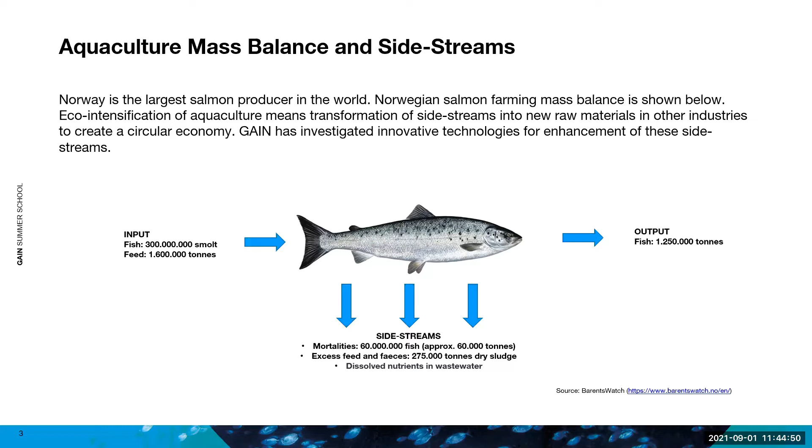This is a picture of the state of the Norwegian aquaculture industry, which is the world's largest on salmon and trout, to show you a little bit about the mass balance and the size of the numbers we're talking about. As you can see, we use more than 1.6 million tons of fish feed for the aquaculture industry in Norway, and we get more than 1.25 million tons of product to the market. However, the biomass lost in between is coming out of this process as a side stream, either as a sludge from feed and feces, or mortalities, or dissolved nutrients mainly. So the aim in our part of GAIN has been to transform these side streams into new raw materials suitable for other industries or potentially back to the aquaculture industry.

As a background for our work, we mapped available technologies to capture the nutrients from the aquaculture industry, and we looked at the different technologies and how well they were performing at the beginning of the GAIN project on fish sludge. The capture of fish sludge was not done previously in Norwegian aquaculture. Usually you could release the sludge into a water body like the ocean or some freshwater recipient that was able to receive that kind of nutrients. But then the Norwegian government started to set some measures that they are not allowed to increase capacity or build new sites if they are not collecting a certain amount of the suspended solids and reducing the chemical or biological oxygen demand.

So in the mapping, we looked at different technologies, and we included in this slide just a few of them, which are some of the typical ways of capturing it. If you work in the aquaculture industry or are acquainted with it, you would probably know drum filters, which are typically used to clean as the first step. In the flow-through or RAS facility, you capture particles from a large amount of wastewater by using a drum filter from Hydrotech or some other solution provider. This will deliver a kind of thickened wastewater. I still call it wastewater and not sludge, since it's very low in dry matter.

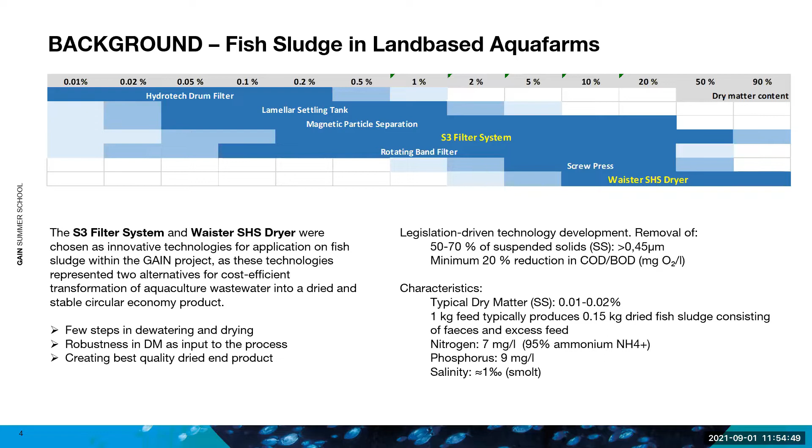So I'll leave to you to continue now, Christian. So the word is yours. You have to turn off your mute. Thank you. Thank you, Heistein.

So to continue, I will first characterize the wastewater from smolt production in detail. If you look at the uppermost part in the table, you see something here that is called suspended solids. This means the particles, so the organic particulate matter that we find in the wastewater. And you see it's 0.006 to 0.18%. So this means the concentration of particles in these types of wastewater is very, very low.

If you take this wastewater and put it in a glass, it looks like tap water. So you have the impression you can drink it. If you smell it, it has no smell, nothing. However, it contains these particles and we must remove them. And this poses a really high challenge compared to other types of wastewater. The particle diameter is usually very small. It's several micrometers. It doesn't reach the millimeter size usually.

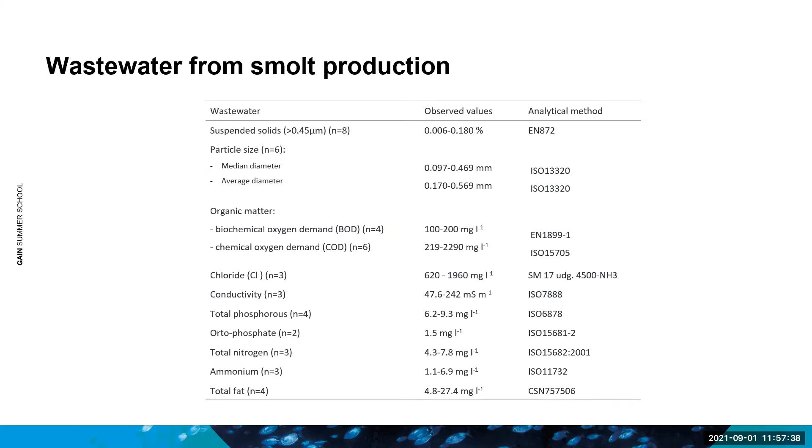So the technologies to remove these dissolved substances are classically based on usual filtration, as we know it from municipal wastewater cleaning and so on. However, this is not sufficient, since the particles in the wastewater are so low in concentration. So therefore, these technologies require so far either a supplement with coagulants, or they must be treated with something that is called sonoelectroflocculation to precipitate these dissolved nutrients, or very low concentrated nutrients.

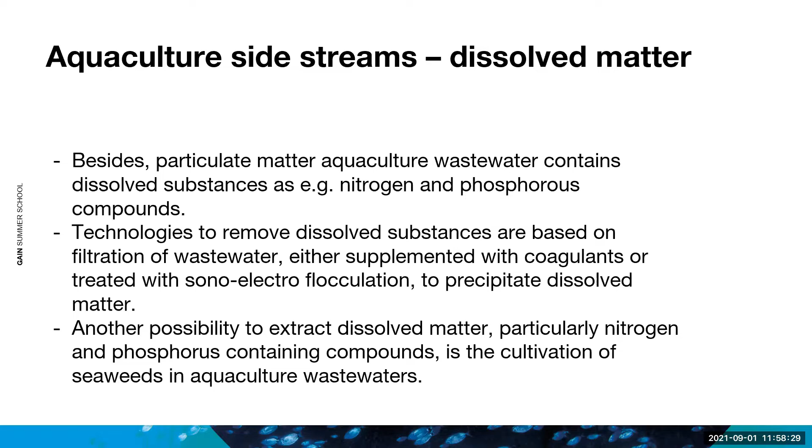And another possibility that we have investigated is to remove nitrogen and phosphorus by cultivating seaweeds in this wastewater, so by aquaponics. Could you please go to the next slide?

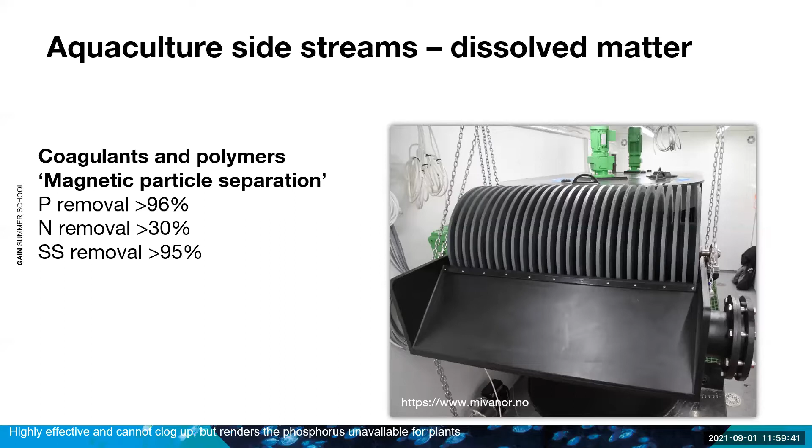And this technology removes phosphorus very, very efficiently. So we have almost 100% phosphorus removal. However, nitrogen doesn't react so well with this technology, so there's a 30% removal. But other suspended solids, some organic solids, fats, and so on, are also removed very well. So this is a technology that is very promising. Could you go to the next slide, please?

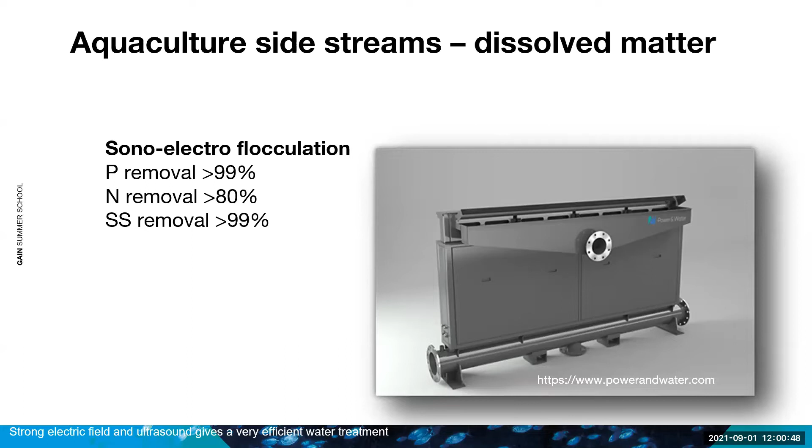For both devices, it was planned that we would test them in GAIN. However, we could not do this, unfortunately, due to this COVID situation, where experts from different countries could not travel to Norway to install these devices here. So instead, could you go to the next slide, please? Instead, we have tried aquaponics with seaweeds to remove dissolved matter.

And to grow this, we had to use a mixture of wastewater, which is basically fresh water, and seawater. Ulva lactuca is also growing very well in brackish water conditions, and therefore this also supported the choice of Ulva as a production crop. And we grew the seaweeds in 4 square meter tanks that were covered with approximately 20 centimeters of water. And then we measured the weight of the seaweed. So we found that a permanent production, where you keep a certain level of the algae in the tank, harvest approximately 50%, and keep the rest to grow out again, performed best.

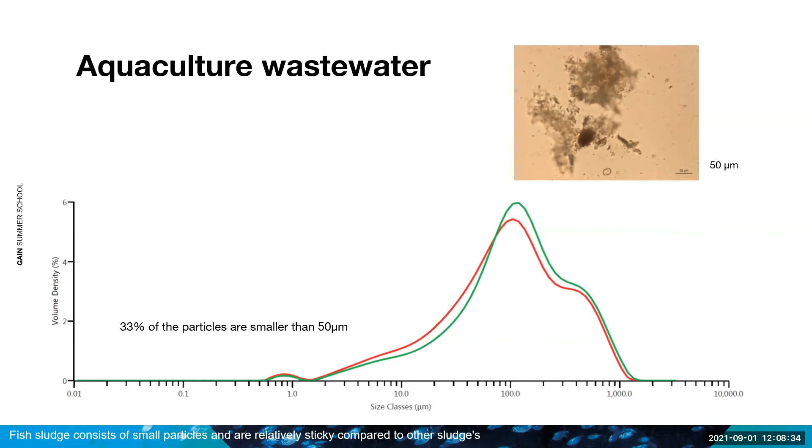The existing technologies are usually based on the technologies that Halston has presented already. For example, drum filters with 20 to 80 micrometer. They are used also for initial dewatering and concentration of particulate matter. And then it's usually followed by filtration with coagulants, polymers, or magnetic particles.

However, in GAIN, we developed a filter dryer together with a Swedish company, LS Optics. We identified this as a very promising technology, since they have a very fine filter using a mesh with a size of only 6 micrometer, which is much lower than 20 to 80 micrometer. During the GAIN project, we could develop this S3 unit towards an efficiency to remove 80–90% of the particles from this wastewater, and to receive a dry matter content of more than 90%. Next slide, please.

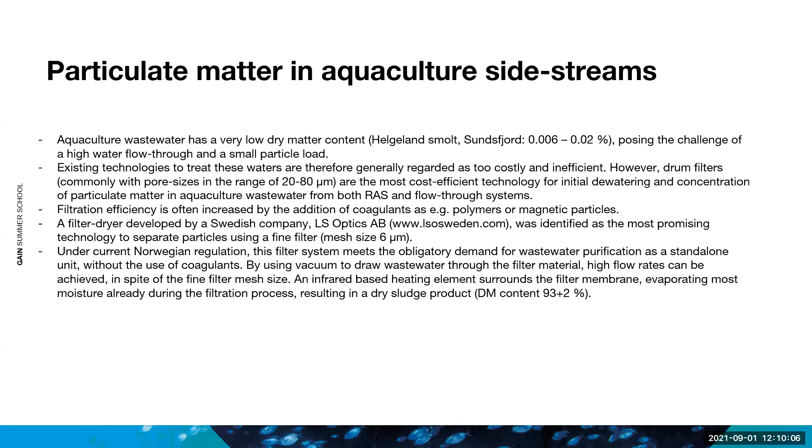And on the left side, you see a so-called vacuum tank. And this vacuum tank is connected to the drum filter and sets the whole drum filter in a vacuum. So there's a lower pressure in the drum filter, and therefore the water and the particles are sucked on the filter surface. The water penetrates the filter and is going to the waste stream there, whereas the particles stick on the outside on the filter.

Then, as you see, only 20–25% of the filter surface is sticking in the buffer tank. Then the filter, while rotating, is going out of the buffer tank, and there the particles start to dry and form a kind of sludge. And this drying is mainly performed by the vacuum, and we installed infrared units above the filter, providing the filter with some extra heat. And this supports the drying process so that, when the filter drum reaches the other side, we have finally a sludge product that contains almost no water. So we reach a dry matter content of more than 90%.

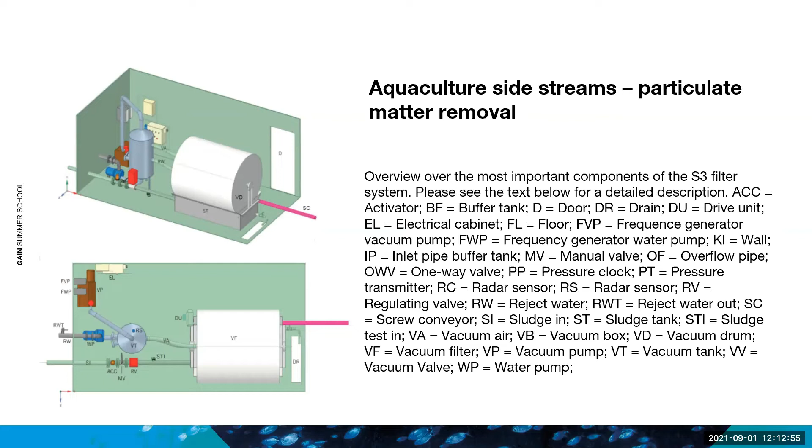I may just say the system runs fully automated, so everything is automated as far as possible. Everything is controlled by sensors, all the water levels, sludge levels, and so on, and vacuum. So this is fully automated and means almost no maintenance. So next slide, please.

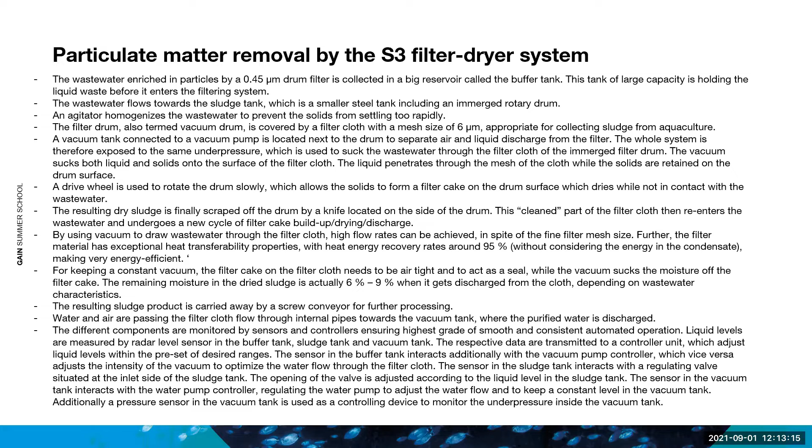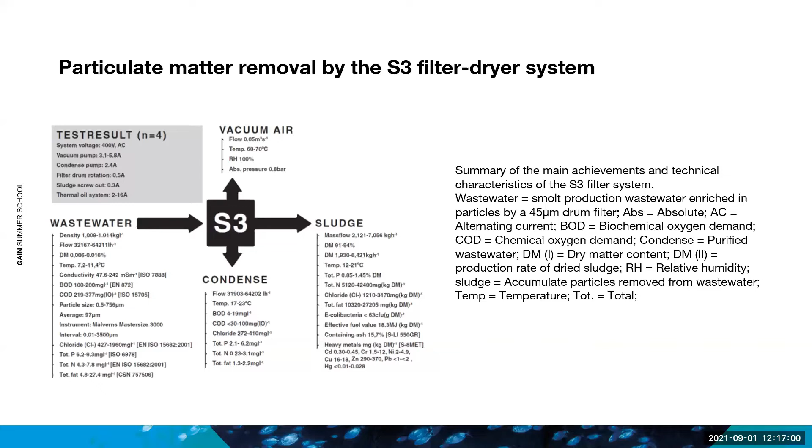Yes, so here you find the description of the whole process that I explained just now in detail. So if you're interested in a more detailed explanation, I would ask you to read through this. So here you have a summary of all the results that we achieved with this new S3 filter. So you see all the chemical details. You see the wastewater here on the left side, chemical characteristics of the wastewater. Here, chemical characteristics of the sludge after purification.

And what we call condense here is the purified wastewater. So basically all the water that goes through the filter evaporates, and therefore it's very, very pure. And so also this is something you should have a look at in detail. I guess it's too much to explain all the details here. Could you go please to the next slide?

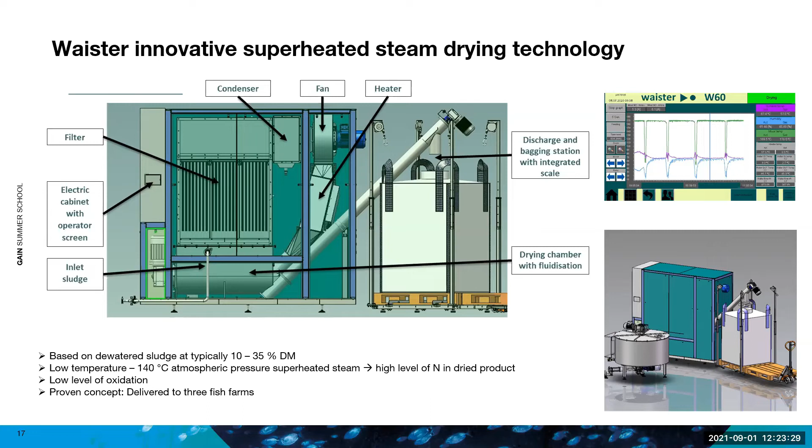I'll not go into details to explain how the machine works in this presentation, and I can do some more details if you are interested in that later. I will then have a look at what this fish sludge, when it's dried, can become as an end product, and what kind of value we have on these kinds of end products.

We had some news that this might now be legal, so there is some change going on currently. So maybe this will actually be a potential way of valorization of the sludge in the not far future. So it has a potential value as an insect feed.

What we know for certain is that the dried product has been used as a very potent biofertilizer product because it's rich in nitrogen and phosphorus. And we'll also comment on the levels of zinc and potassium in a coming slide. But it has a certain value in the European market. Typically, if you look at these nutrients, the value used as a fertilizer by the farmer will be from 250 euros per ton and up to 400 euros per ton.

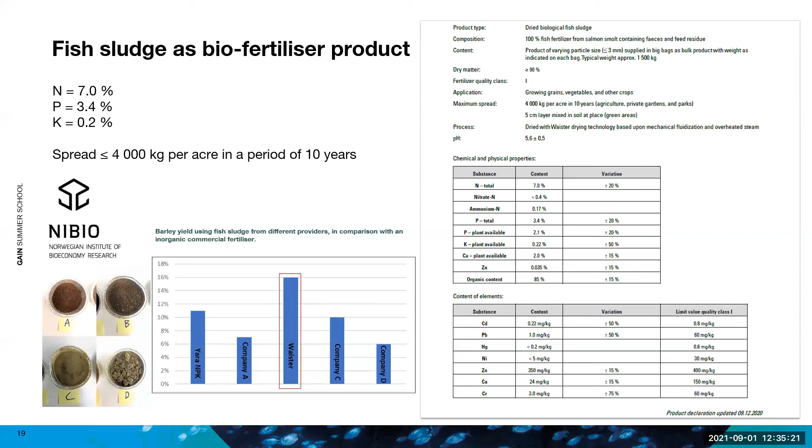Different areas with different soil have low or high levels of zinc, and in some areas in Norway they actually add zinc with a fertilizer because they need to increase the zinc level. Some other places have a surplus of zinc in the soil and don't need that component. So this is very much a question of the need of the local soil, whether this is the best fertilizer or not for the plants.

As last part of our presentation, in the GAIN project, we also looked at the third side stream, which was the mortalities and also discarded fish. This was first done by us on a smolt farm, Helgeland Smolt in northern Norway. There is always some loss during the breeding cycle, both in the hatcheries and also at sea sites.

What is the most commonly used process today is the ensilage, which means you need to have formic acid. You mix that with the fish, and also you usually add some water in that process with the grinding and mixing with the acid.

This has, however, some side effects, and that's some injuries and work-related hazards with the treatment of the acid locally and also during transport and storage. Even deaths have been as a consequence of some of the incidents, and many serious incidents and many minor where they have breathed the gases from the ensilage tanks or get a skin burn from the acid.